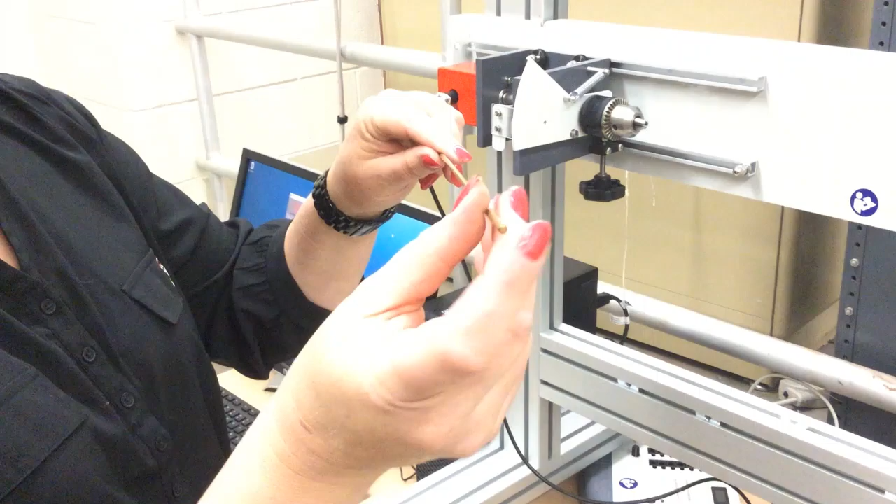So this lab is the torsional stress and angle of twist lab. We are going to use two specimens. They are both brass. Note their yellow color. One of them has a solid cross section. This is solid circle. And the other one has a tubular cross section. Note the hole in the middle.

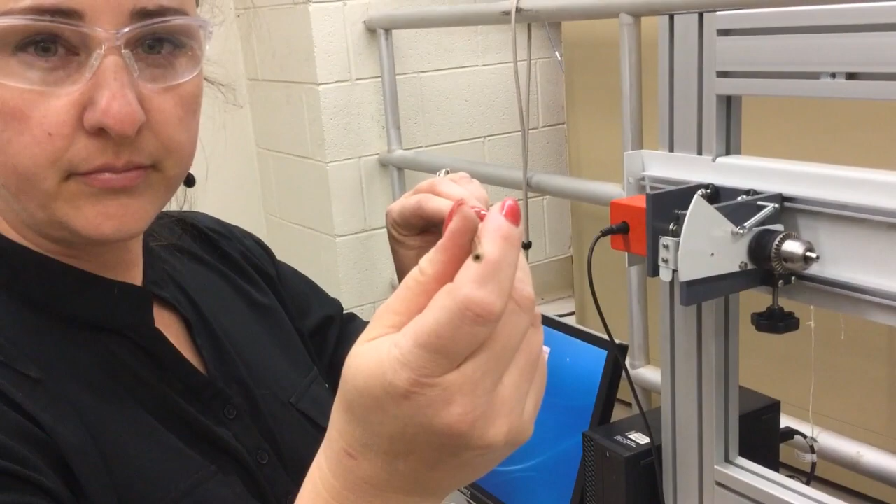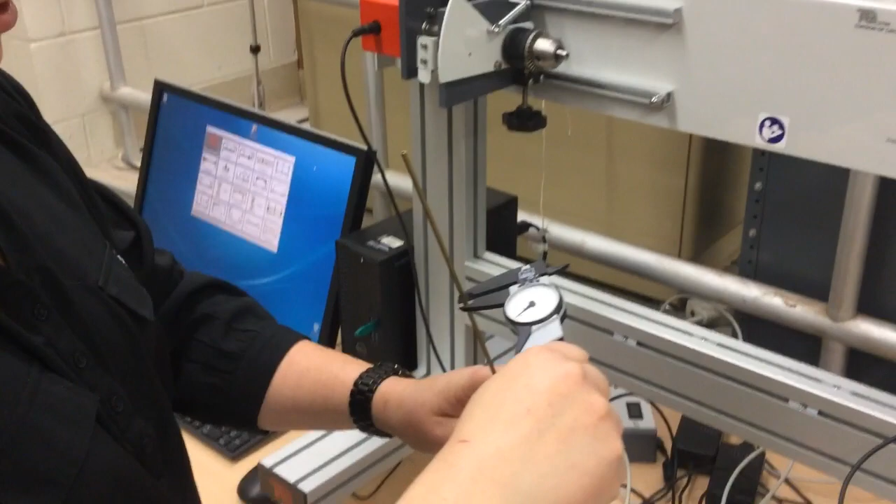They both have the same diameter. I can measure the diameter with my calipers here. Okay, so that measures about 3.2 millimeters. And this is the tubular section, my solid section. Let's give that a shot. That's going to measure about 3.2 millimeters.

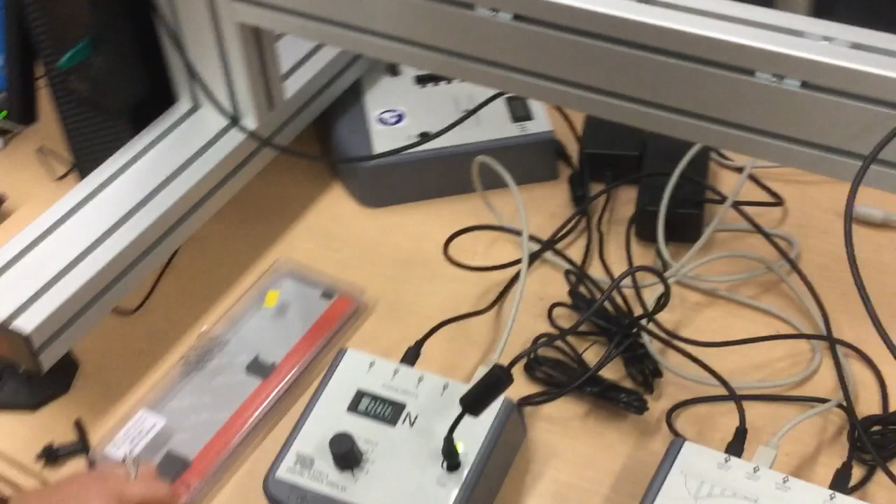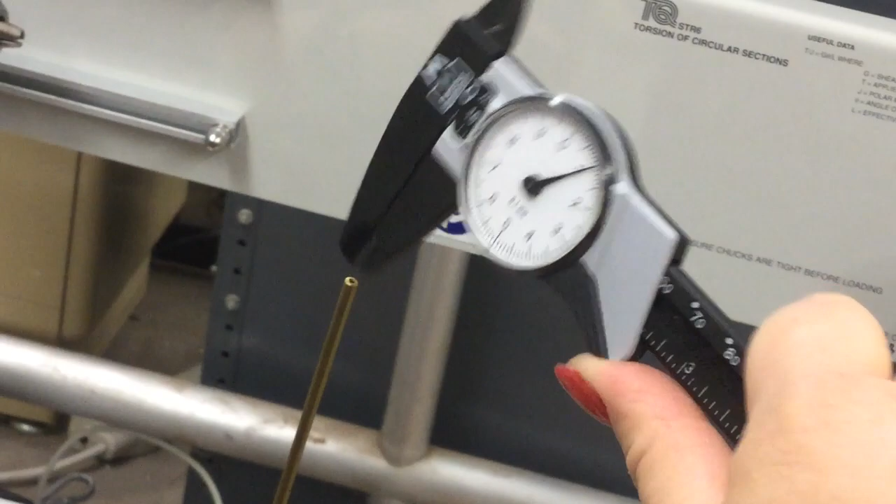Okay. Tubular section, I doubt I'm going to be able to get a wall thickness, but I can give it a shot. There's no way I'm getting a wall thickness. Come here. Okay. This side is intended to measure the inner diameter, but it doesn't fit, they're too small. So I'm just trying to measure the best that I can here. And I get a wall thickness of about 0.9, 0.8. Oh, that went in just a little bit. And so we'll check out what the TecQuipment software says.

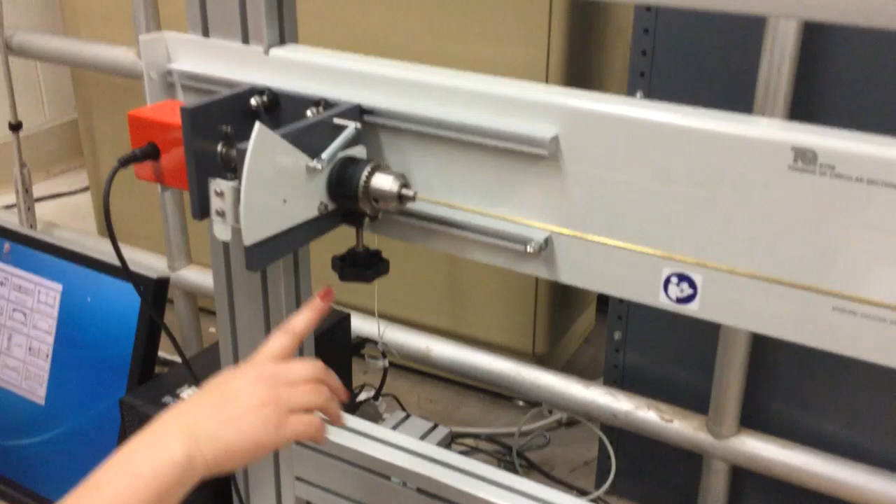All right. I'm going to start with the tubular cross section. It's going to go in here to our fixed end. Okay, so note there's no movement here, so this is my fixed end. And then I'm going to attach it over here to my loading end. I know this is the loading end. It's got the loading knob here that we've seen before in the bending stress and the column. Okay, so that's gonna load it, and we'll talk about the loading in a second.

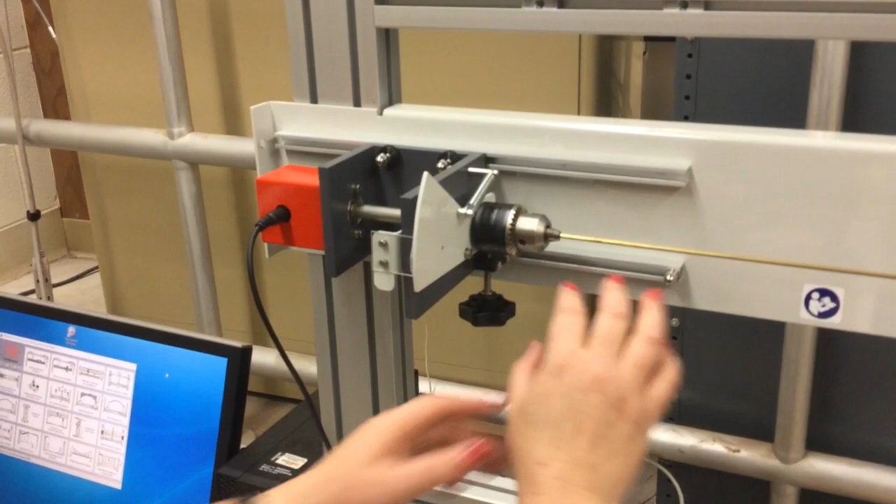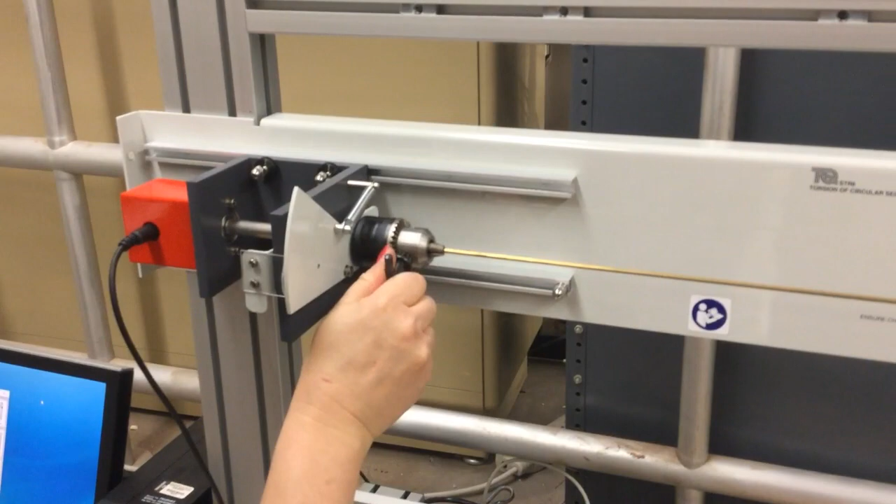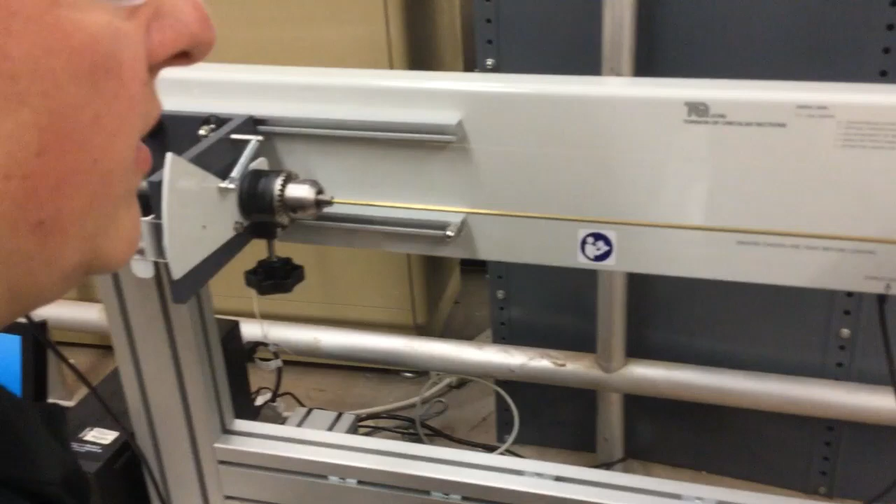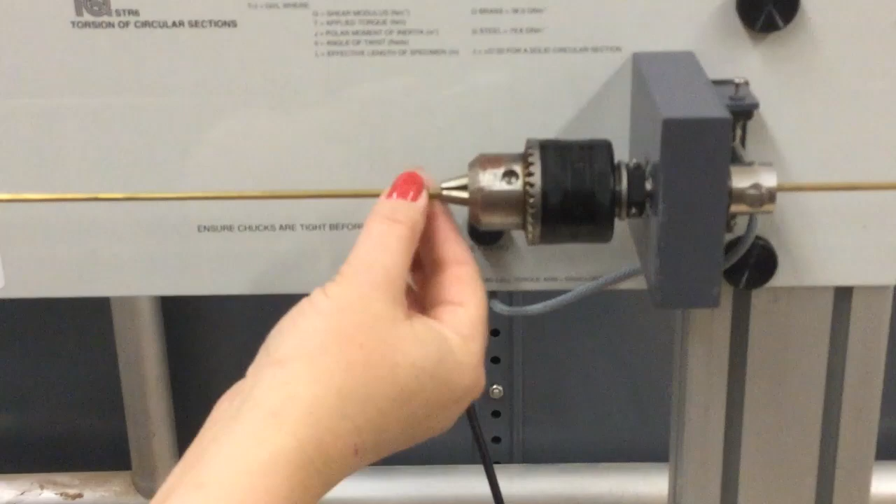So I'm going to refer to these as chucks. So I need to tighten the chuck here, righty-tighty. Do that by hand before I get to my key. And tighten the chuck here. Okay. All right, so this is my right side, this is my fixed end, and you'll notice that my force output here is connected to this right end. Why? Because that's where the reactions are going to be for the fixed end, right? So it's going to be measuring the force on this fixed end. Okay. I'm making sure everything's aligned in the middle so that my tubular specimen here will not slip.

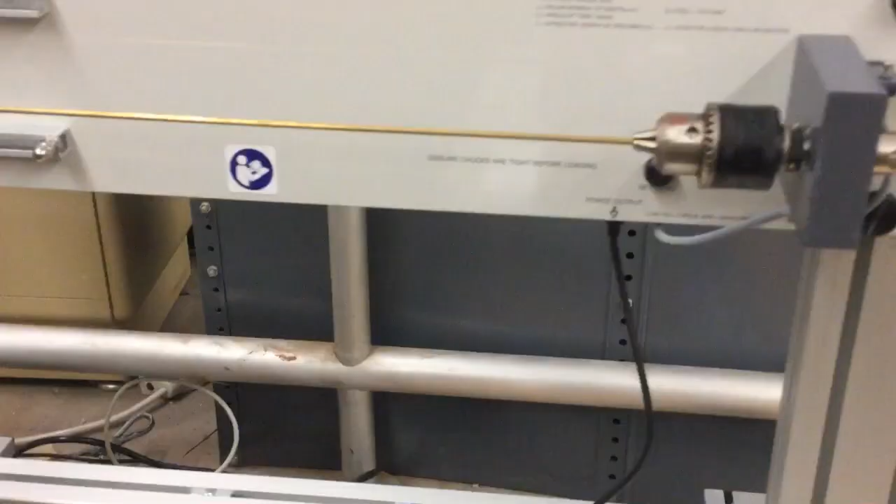Okay. Force output is connected here to the DFD, so my digital force display, in channel 2. DFD is connected to the ADA. The ADA is also connected to the angle input. So we will not be actually measuring torque. We're going to be measuring the angle of twist and the force. Okay? The angle of twist will be measured over here. That's what we'll be changing with our knob, is our angle of twist, and that's connected up here. Okay, so angle of twist at the free end, force at the fixed end. Okay.

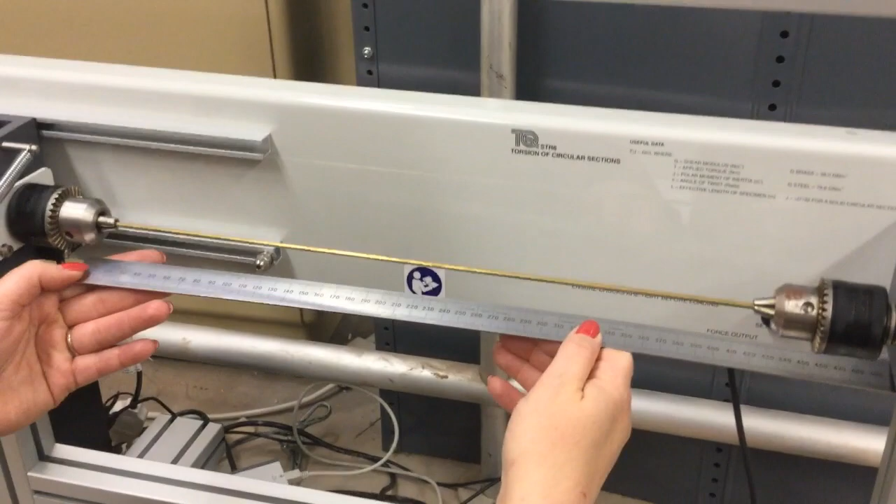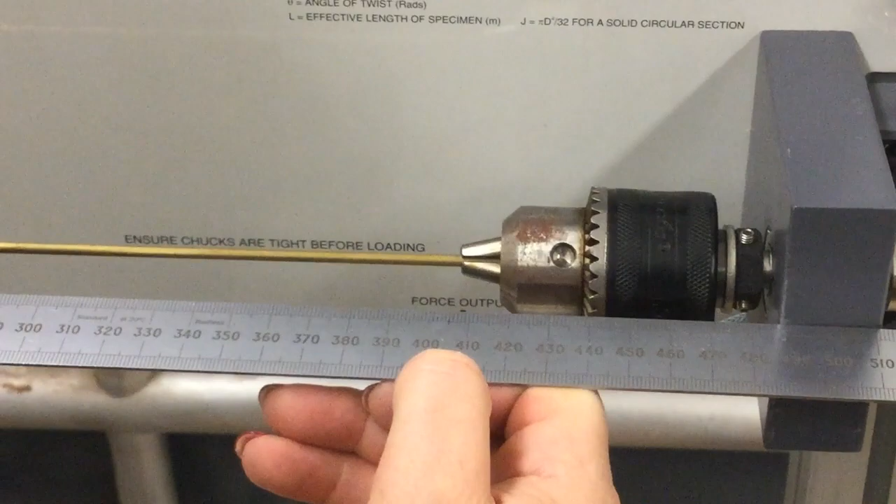I'm also going to need a length for my angle of twist. The length that I want to measure is going to be from the connector tip to the connector tip of the chuck, because this is the free span that's going to be able to twist, right? It's being held in place here, so it's not twisting. So I need this free span. So using my metal ruler, and to the best of my ability, I get about 400 millimeter free span length from chuck to chuck tip. So that's going to be the length that I need to enter into my software.

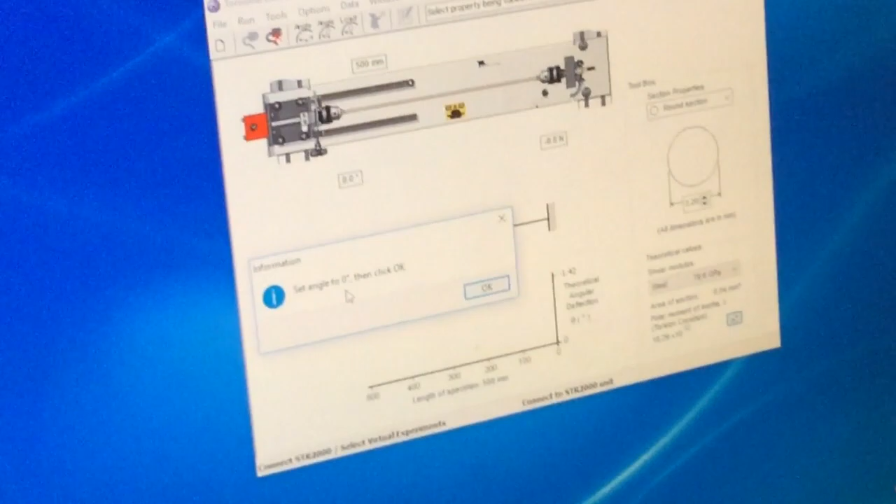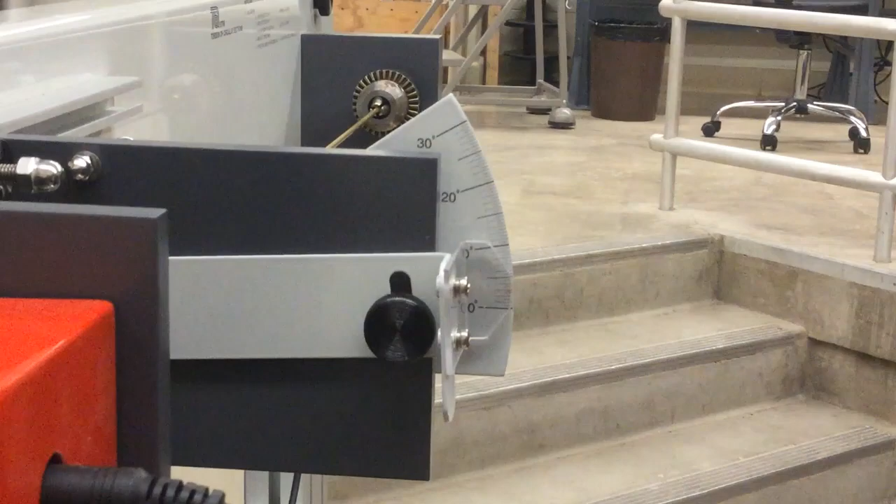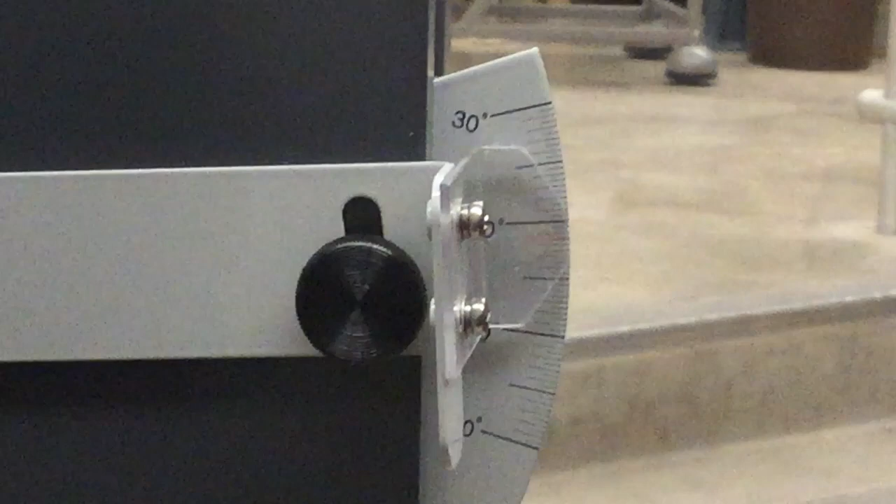All right, we're doing torsional. I'm going to connect the ADA. It asks me to set the angle to 0. My angle is set to 0. There's a red line here that should be aligned with my black line angle of twist. I'm going to click OK. Now it wants me to set the angle to 25. So I'm going to twist counterclockwise. You can see my light red line here, until I get to 25.

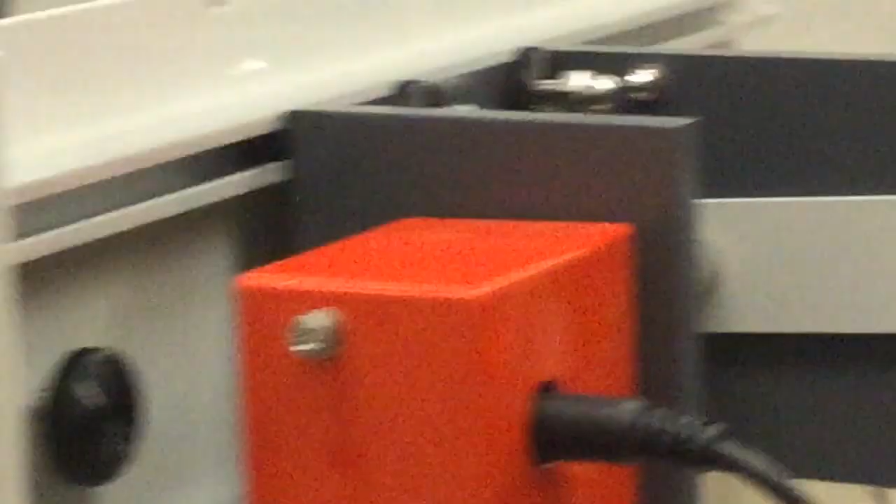Okay, pardon me. All right, okay. Calibration was successful, thank you. All right, I'm going to take it back down to 0. All right. Angle 0. Load 0. Okay, and as per usual, I had it set to the wrong one. All right.

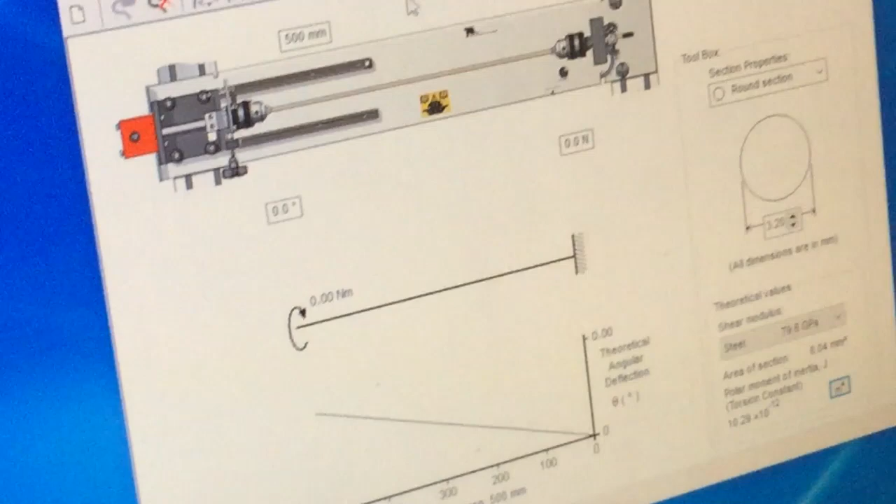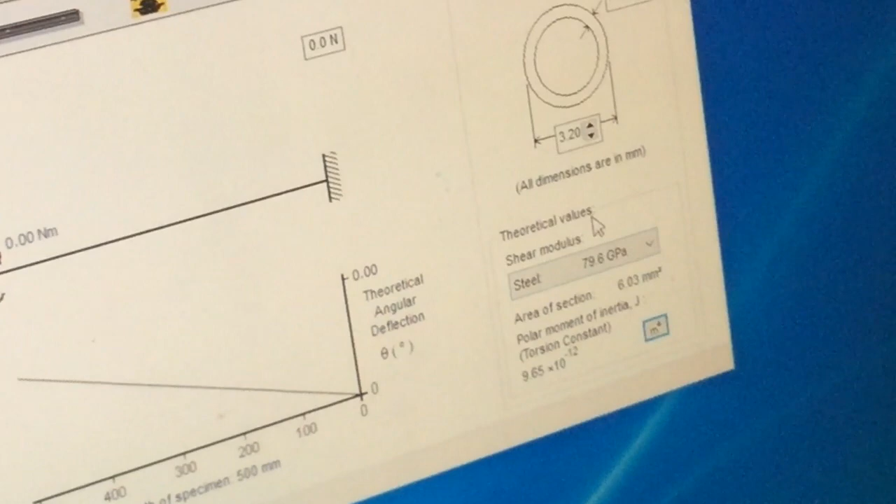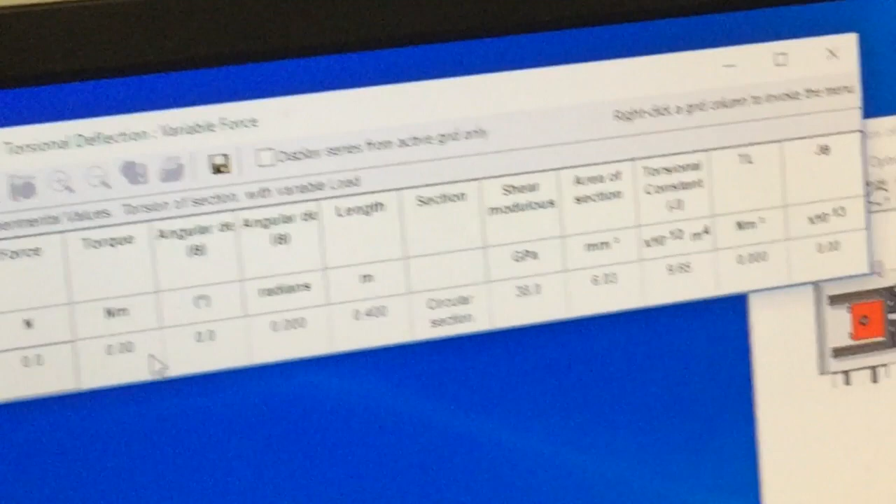Okay, we are going to be varying the force. We are using the tubular section first. And it seems to think that we'll be doing 3.2 diameter with a 0.8 wall thickness, which is about what we measured. And I'm going to tell it that we're using the brass. Okay, so everybody's 0. Oh, 500. Remember, we measured a length of 400. So let's scooch this over till we get to 400. Okay, everything's set. So I'm going to take my first readings at 0. 0 force, which means 0 torque, 0 angle. Everything's nice and 0, except the geometric properties.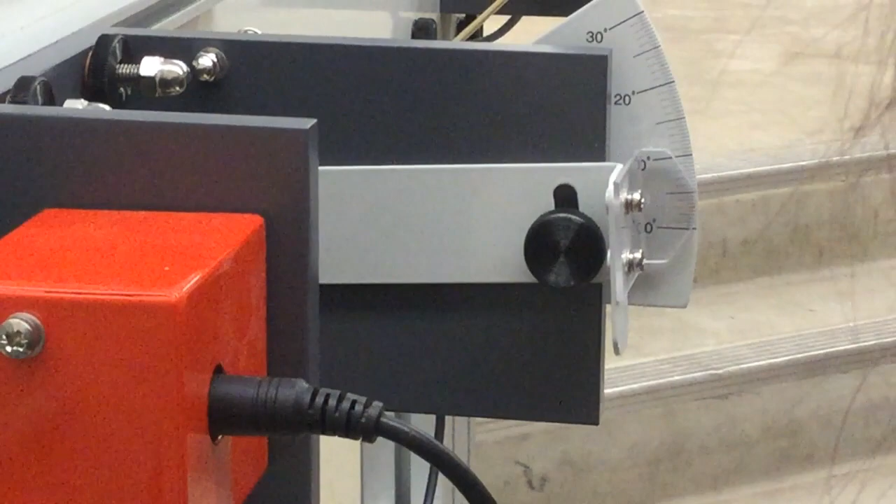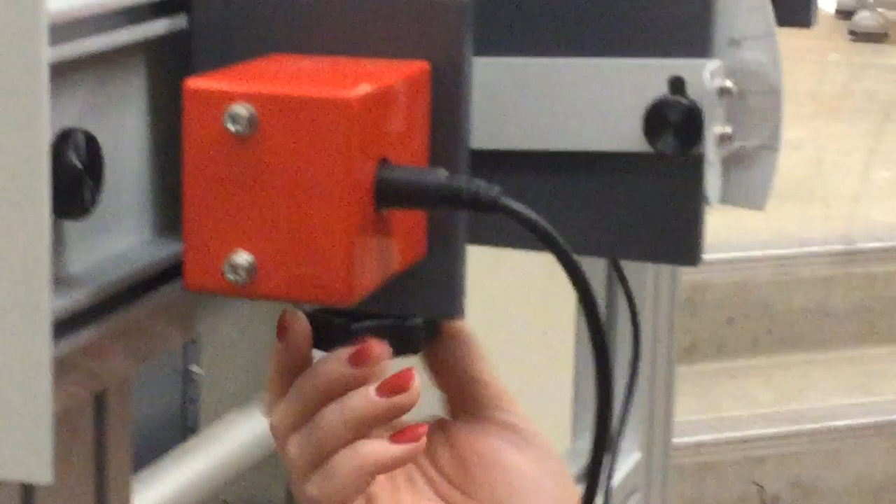All right, I'm going to increase my angle to 5 degrees. Record the data. I'm going to increase my angle to 10 degrees. All right, about 10. Record the data. This is what we're changing here. Up to 15. And record the data.

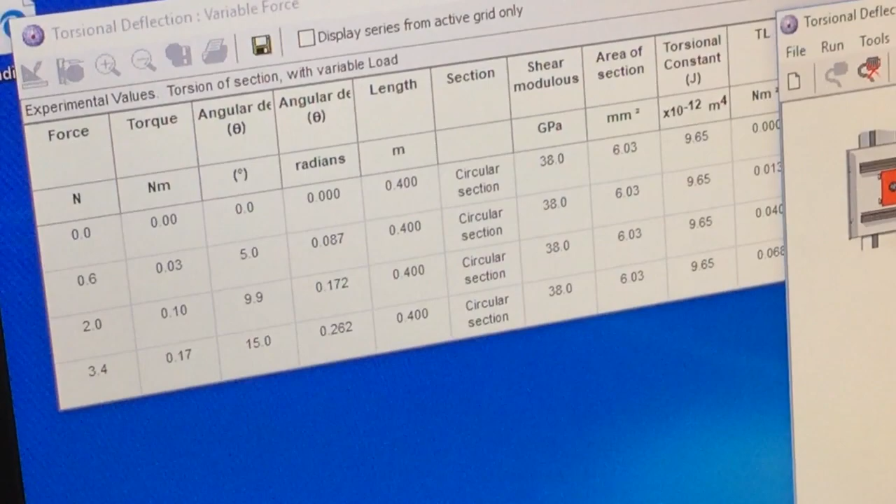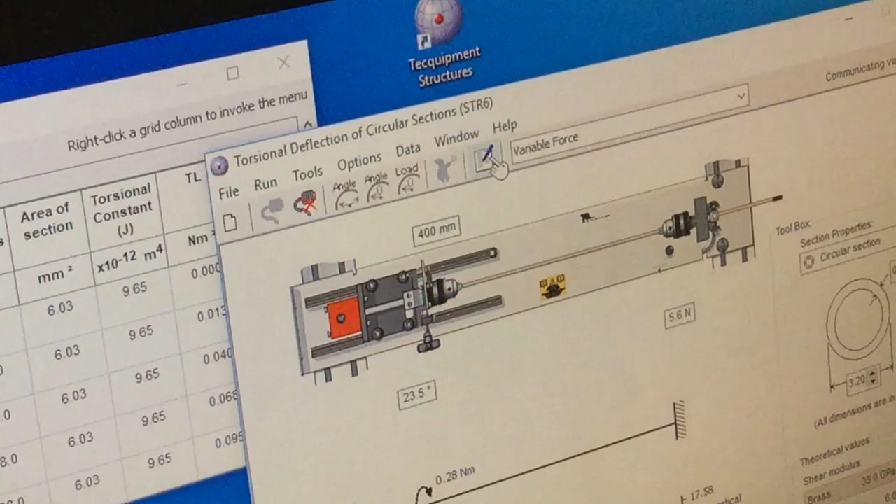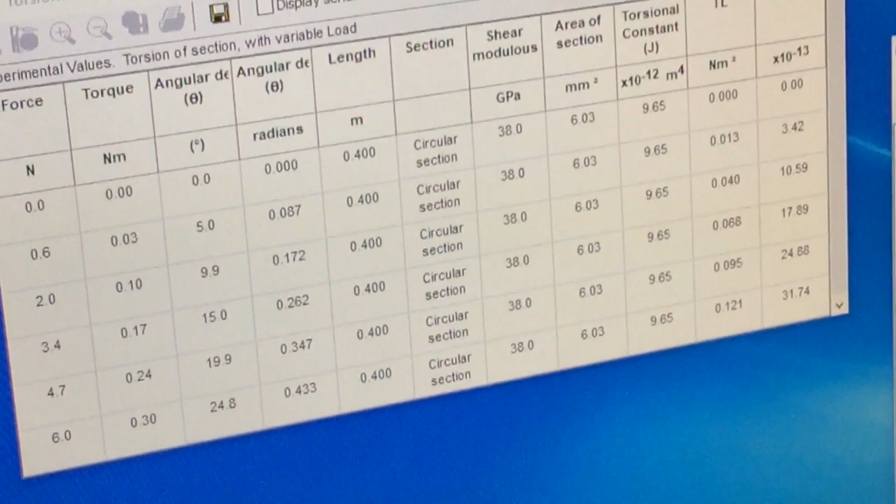Up to 20. And record the data. Last one up to 25. And record the data. There we go. I apologize. I should have done that. All right.

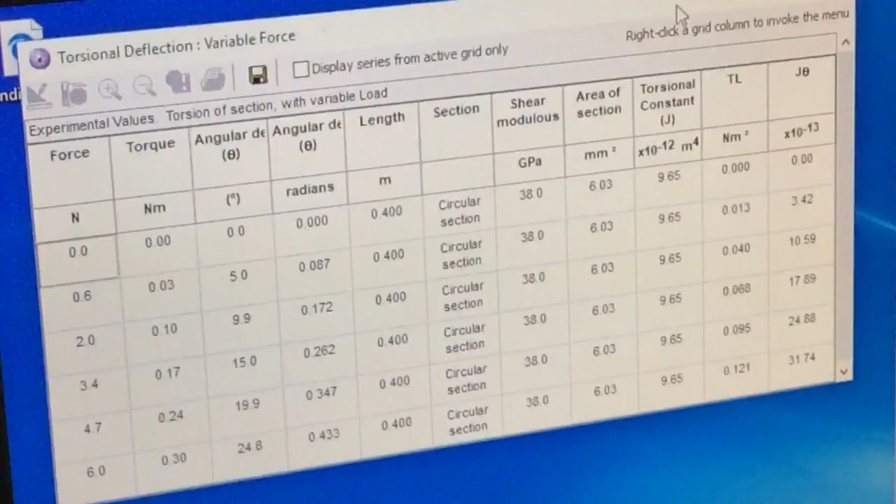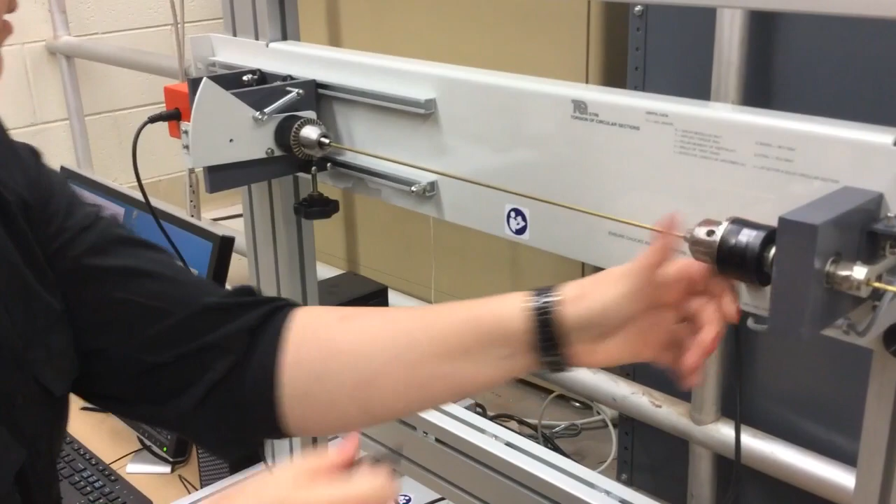I have all the data for my tubular, so I'm going to unload and get it back to 0 angle of twist. And I'm going to switch out for my solid cross section. Okay, I have not moved any of the chucks, so my length should still be the same. 400. Now you've got me all worried about angles. Okay, come here, key. Tubular comes out, solid cross section goes in.

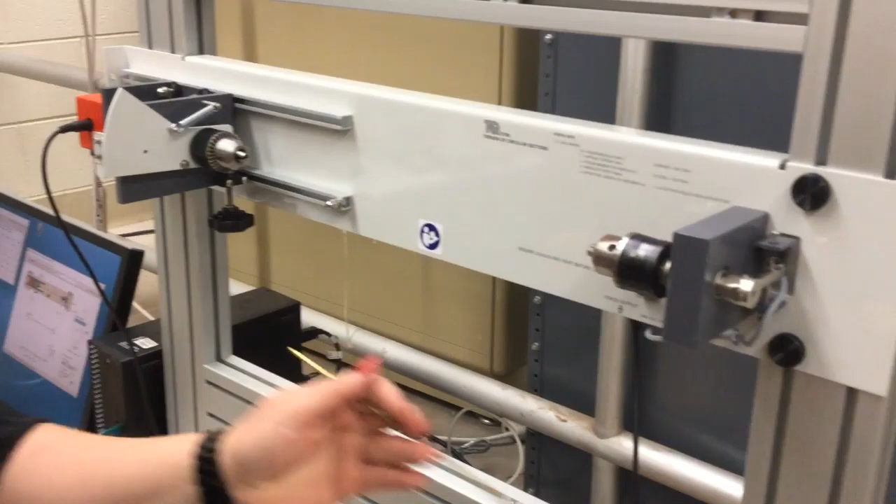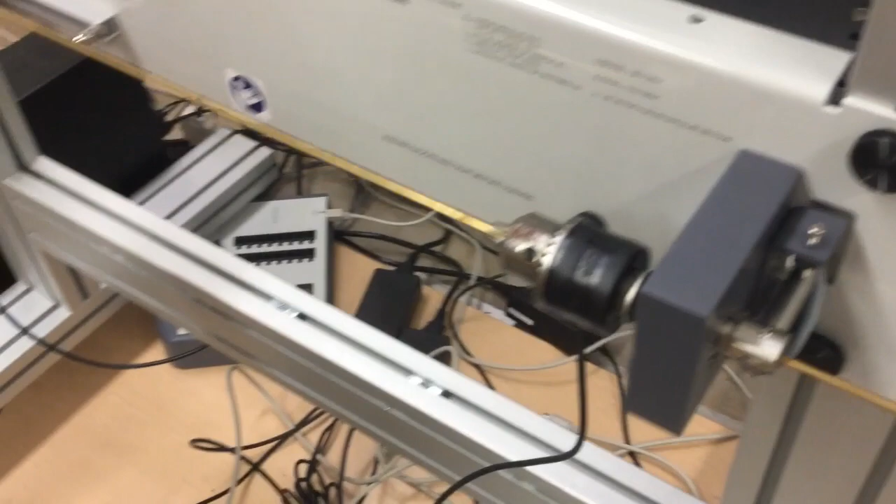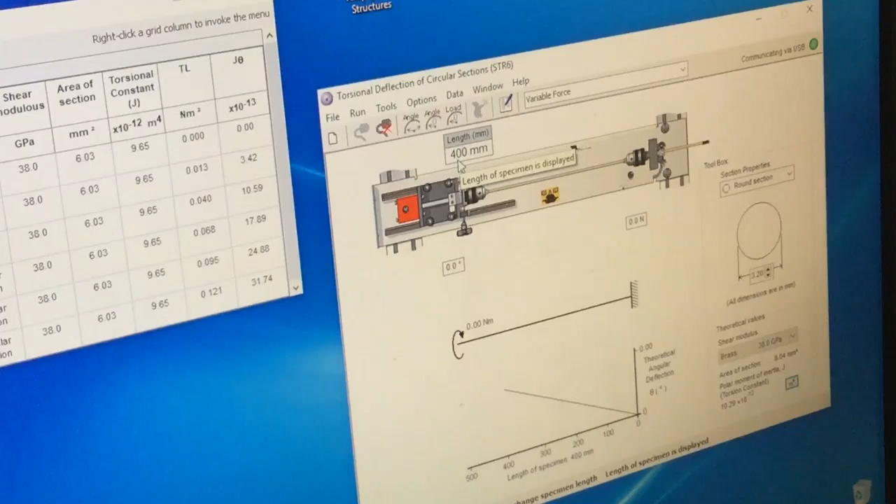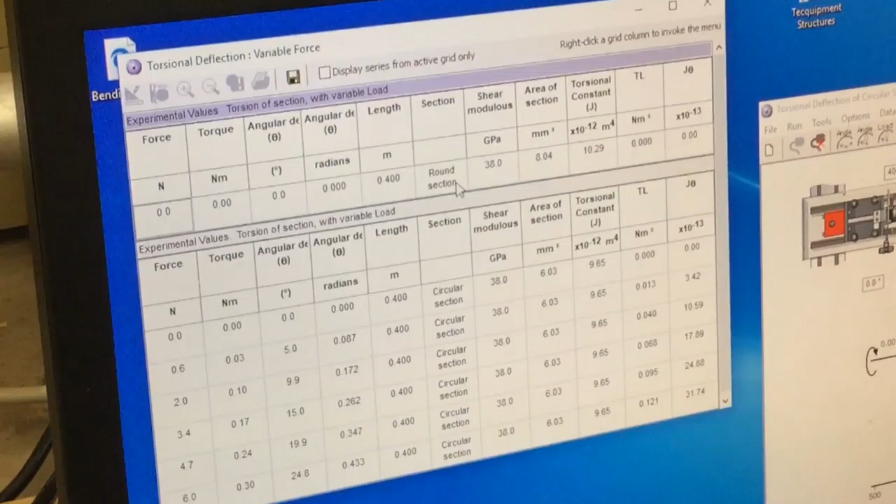So back to our software, I'm going to reset the angle to 0. Yes. Reset the load to 0. Yes. Close. I'm going to switch to the solid cross section. It is still brass. It is still 400 millimeters in length, and we are still varying the force. Okay. I have my table open from my tubular information. Okay. I said yes this time, and it's created a new table for me with a round section with all my fun information. Okay.

5-degree increments. Increase to 5 degrees. Hold on, I want to make it perfect. Here we go. Much better. Record. Increasing to 10 degrees. And record. Increase to 15 degrees. Ooh. Back off. And record.

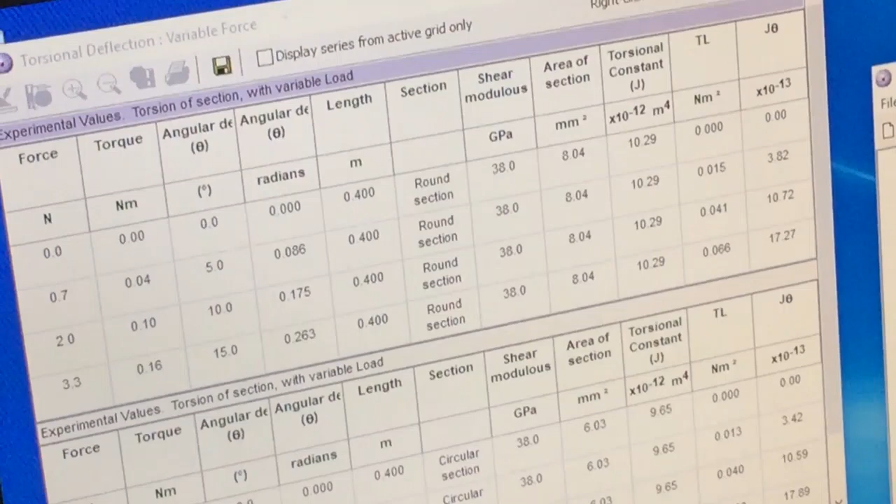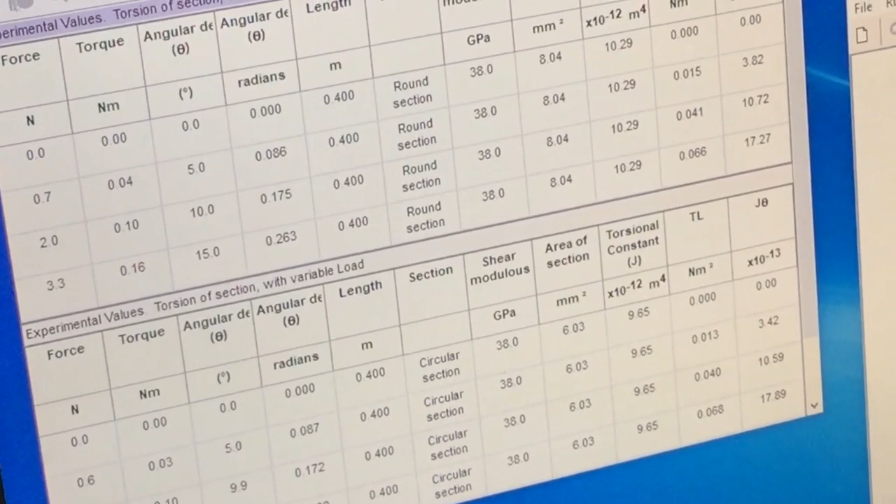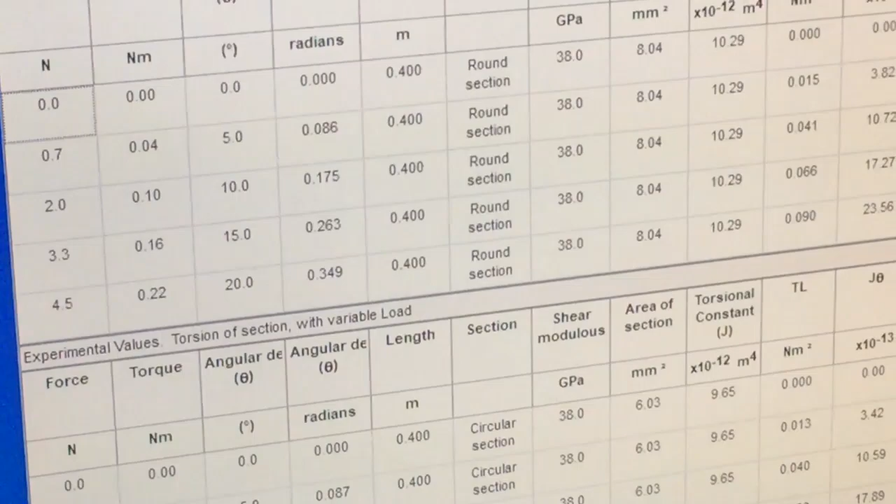Increase to 20 degrees. And record. Increase to 25 degrees. Ooh, it's a lot stronger. And record. All right, there's all the information that we need for this lab.